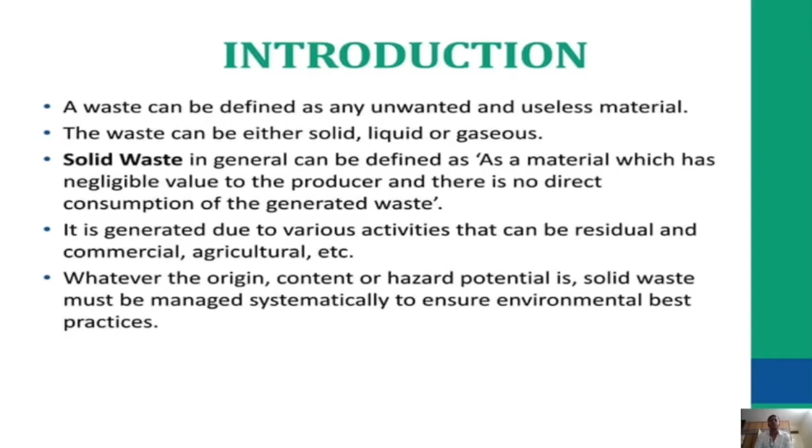A waste can be defined as any unwanted and useless material. The waste can either be solid, liquid, or gaseous. Solid waste in general can be defined as a material which has negligible value to the producer and there is no direct consumption of the generated waste. It is generated due to various activities that can be residential, commercial, agricultural, etc. Whatever the origin or content of hazard potential is, solid waste must be managed systematically to ensure environmental best practices.

Sources. There are many sources of solid waste such as municipal solid waste, street sweeping, sewage treatment plant, waste from schools and other institutions, domestic waste, garbage, rubbish, paints, paper, glasses, old toys, old clothes, spoiled food, etc. Commercial waste from different stores and offices, mining, from coal mining, strip mining, etc. Agriculture waste, fertilizer and pesticide containers, organic waste, etc.

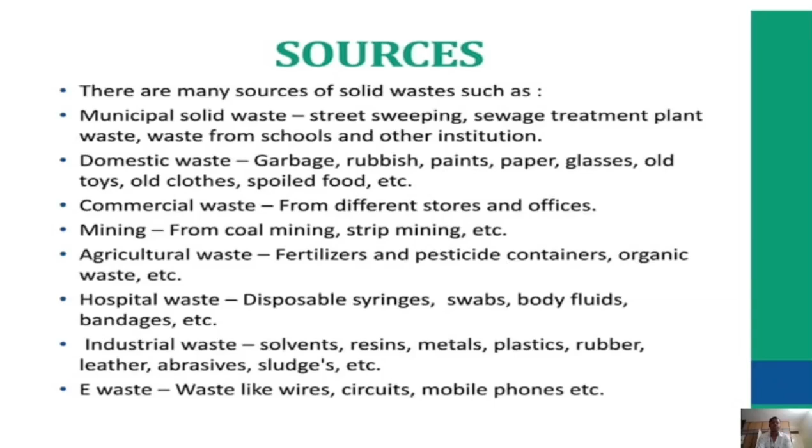Hospital waste: disposables, syringes, swabs, body fluids, bandages, etc. Industrial waste: solvents, resins, metals, plastic, rubber, leather, abrasives, sludge, etc. E-waste: waste like wires, circuits, mobile phones, etc.

Effects. Solid waste changes properties of soil, air, and water, causing pollution. Solid waste produces foul smell, breeds insects and organisms, leads to spread of many diseases and infections, etc., affecting human and animal population. Harmful chemicals are released into the environment.

Solid waste management. Solid waste management is defined as the discipline associated with control of generation, storage, collection, transport or transfer, processing, and disposal of solid waste material. Solid waste management includes planning, administrative, financial, engineering, and legal functions in the process of solving problems arising from waste material. The primary goal of solid waste management is reducing and eliminating adverse impacts of waste material on human health and environment, to support economic development and superior quality of life.

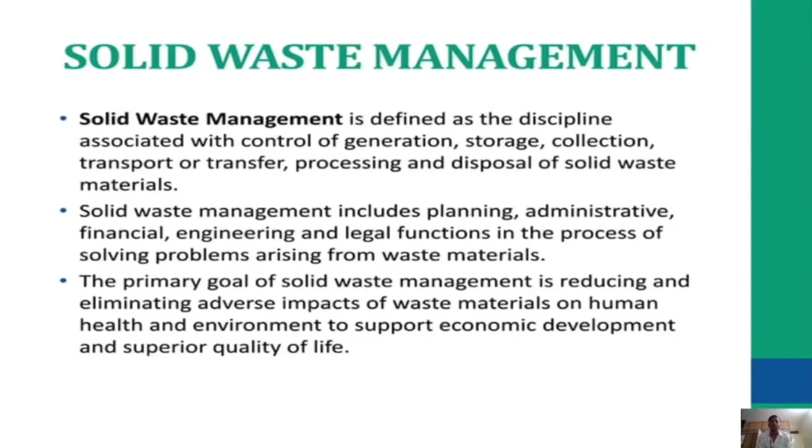Functional elements of waste management system. There are five functional components of a waste management system as outlined below: waste generation; on-site handling, storage and processing; waste collection; waste transfer and transport; waste processing and recovery.

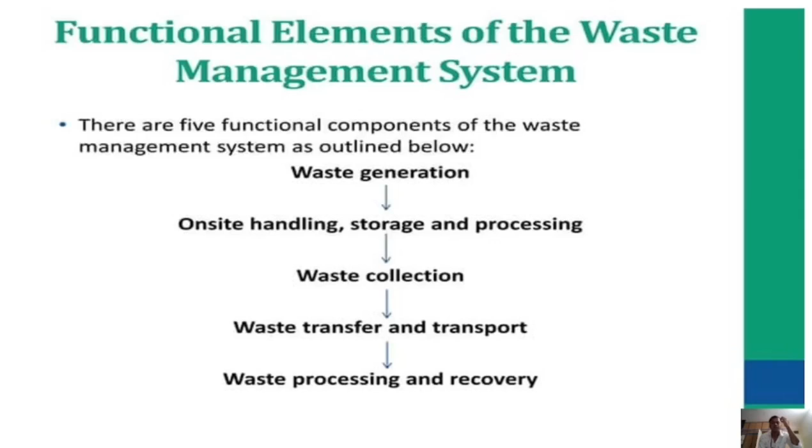Solid waste treatment. The processing methods available for management of solid waste include segregation, reduction, reuse and recycling, chemical, biological, and thermal conversion, etc. Segregation.

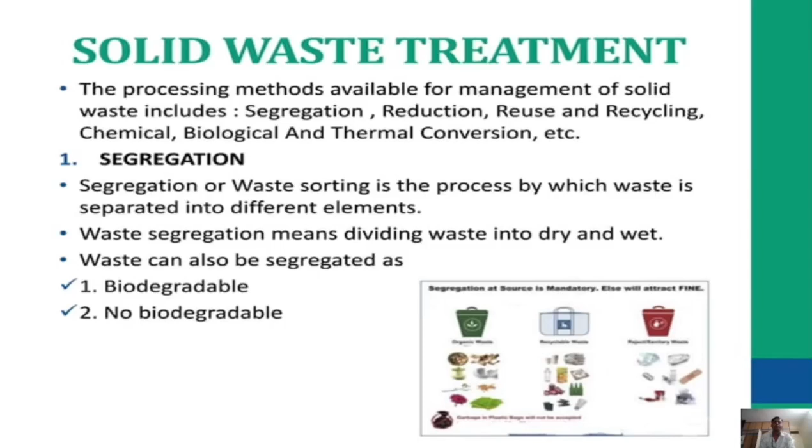Segregation or waste sorting is the process by which waste is separated into different elements. Waste segregation means dividing waste into dry and wet. Waste can also be segregated as biodegradable and non-biodegradable.

Reduce, reuse, and recycle. Reduction is the most important strategy of the 3Rs. It focuses on the source of the waste, or where the waste is originally coming from. Source reduction is carried out when products are designed, manufactured, packaged, and used in a way that limits the amount or toxicity of waste created.

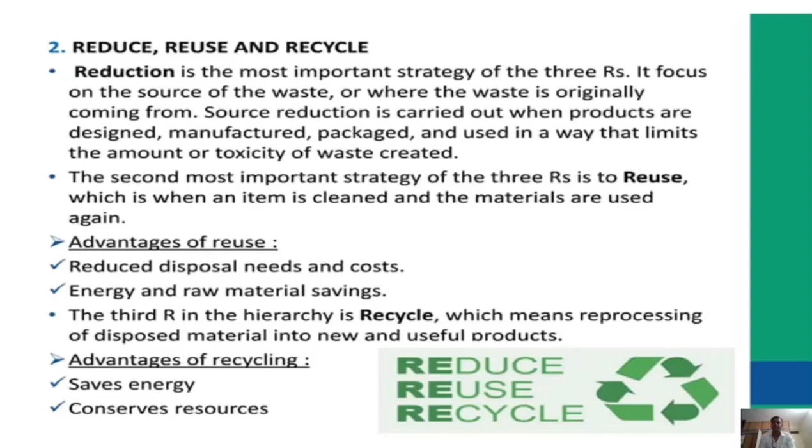The second most important strategy of the 3Rs is reuse, which is when an item is cleaned and the materials are used again. Advantages of reuse: reduced disposal needs and costs, energy and raw material savings. The third R in the hierarchy is recycle, which means reprocessing of disposed material into new and useful products. Advantages of recycling: saves energy, conserves resources.

Chemical processing. Chemical processing involves chemical transformations or conversions of the organic fraction of waste into various useful compounds such as glucose, synthetic oils, gases, etc. Example: glucose is recovered from waste containing cellulose.

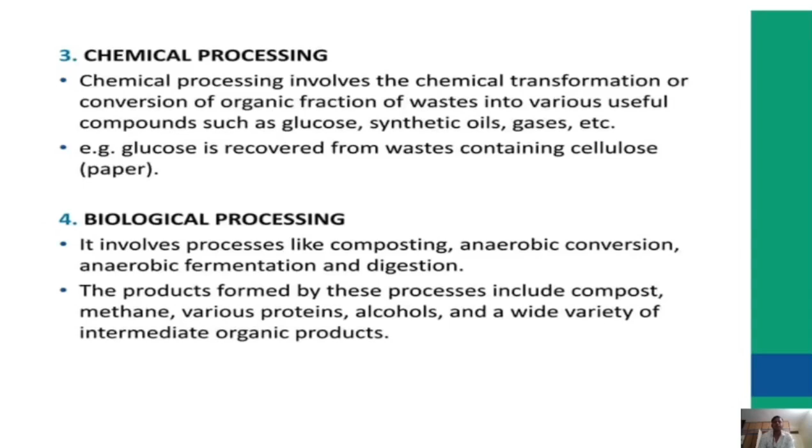Biological process. It involves processing like composting, anaerobic conversion, anaerobic fermentation, and digestion. The products formed by this process include compost, methane, various proteins, alcohols, and a wide variety of intermediate organic products.

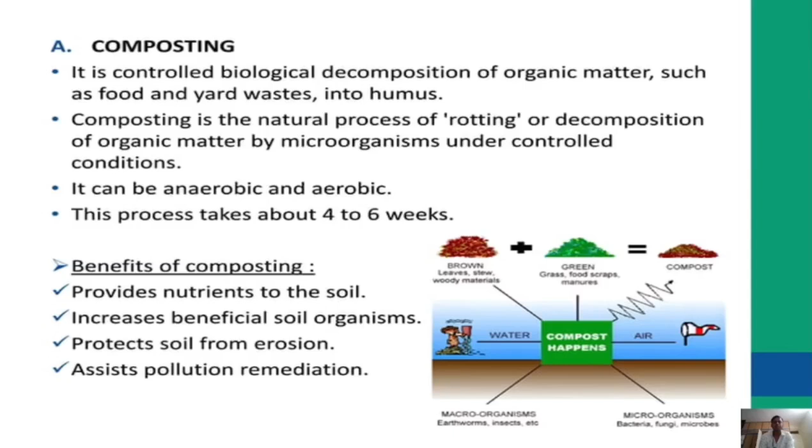Composting. It is controlled biological decomposition of organic matter such as food and yard waste into humus. Composting is a natural process of rotting or decomposition of organic matter by microorganisms under controlled conditions. It can be anaerobic and aerobic. This process takes about 4 to 6 weeks. Benefits of composting: provides nutrients to the soil, increases beneficial soil organisms, protects soil from erosion, assists pollution remediation.

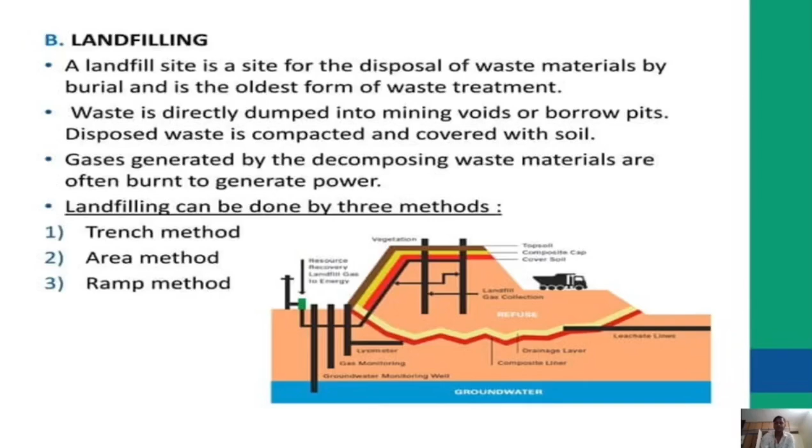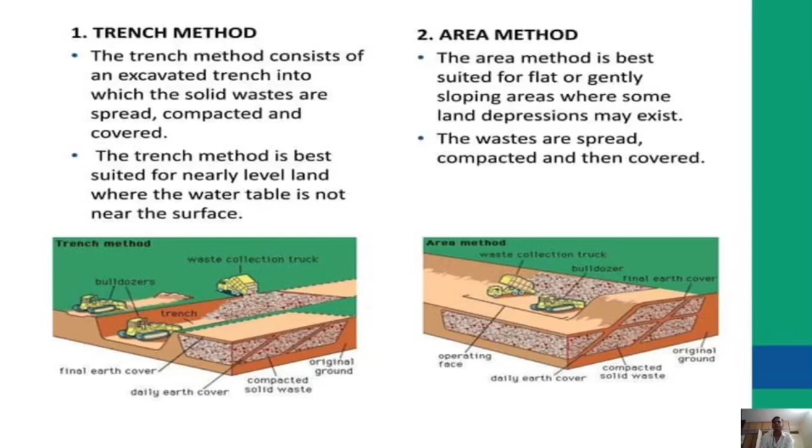Area method. The area method is best suited for flat or gently sloping areas where some land depression may exist. The wastes are spread, compacted, and then covered.